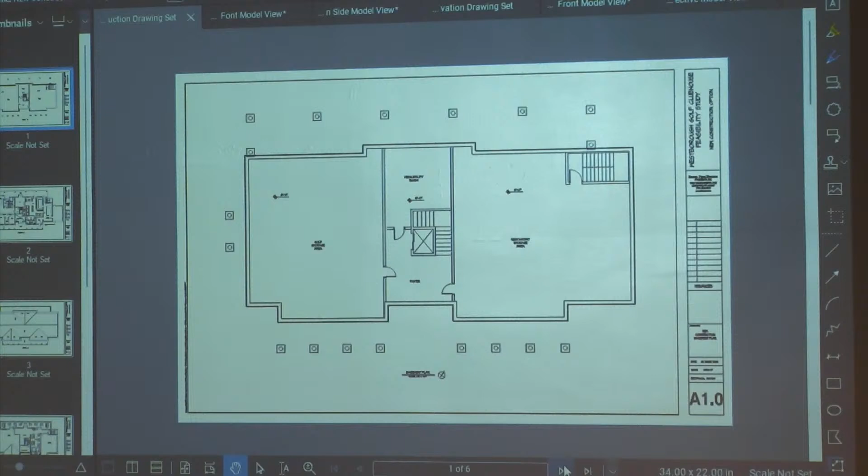And then, in doing the elevations, we played with some of the faces of the building to give relief to certain areas and add some character in. This is slightly changed from what you've last seen — we pulled out some areas and pushed in some areas, but the general layout is pretty similar.

Club shop, pro shop on the left with an entrance, office, storage, and bathrooms, a main foyer that everybody would enter through, and stairs up to the second level of the restaurant, kind of like a rear foyer that could be an interior public space for the clubhouse if they need it, or tables and chairs, a sitting space, extra space, then a bar to the left, bathrooms and kitchen back of house, and a covered patio to the rear and a covered patio to the front.

Which we've kind of imagined as your main approach to the building. For the restaurant, the main approach would be up through there, also to the front.

Imagine this, since we had proposed parking here, you might have a main path coming from this direction and a main walking path coming this way. So this is your main entrance. Then if you're coming off the course, you can enter through the rear, or if you're coming out of the pro shop, these give you your two paths to the bathroom facilities as well.

But yeah, I think we can - can I ask you just one other question? The pro's not here, but I know Howie has a smaller office now - I'm assuming you could put, where the door is now, a door that faces into the pro shop? A lot of times now he comes in, but he can see people coming in and talk to people as they come in.

Yeah, this can all be reconfigured depending on if he wants the door out - so if you're sitting at your desk, you can see people coming in, versus this being a little more concealed. I think there's plenty of wall space in that area, and there can always be little jogs made in the walls to get more, so you can put the door there and shift some of those entrances around.

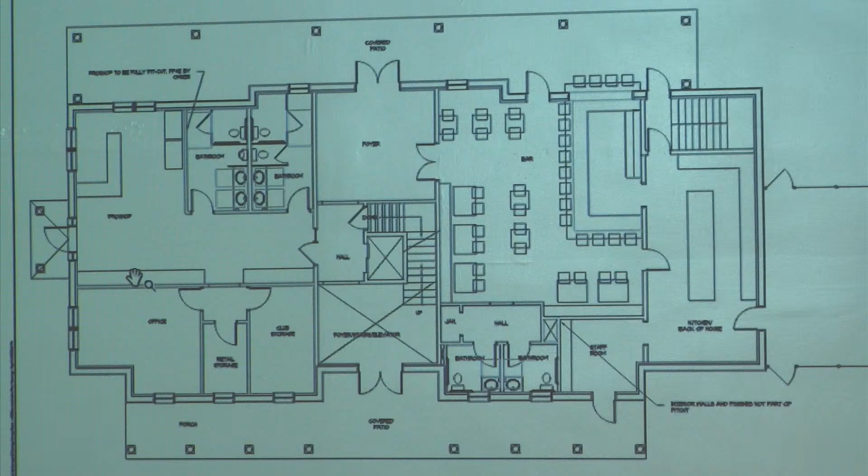Right, perfect. Lauren's touching on a good point - there's a lot more to the design that has to happen from going from here to there. These things are deceptive. It looks like, oh, we're all set, let's start construction tomorrow. But there's a lot of discussion that should happen, and that's the process going forward - you meet, go through it, and figure out all these really important features. How much display wall is needed, where's the best way to have an entrance, the idea of visibility, looking out and seeing customers in the shop, all that good stuff. That will come. We just really wanted to, since we nailed the plan down, make sure everything was given an appropriate amount of space before it went out to estimating, so that we weren't like, oh wait, there's not enough space. It has to be real enough looking without it being the final plan.

I think these are a little out of order. The second level, it's kind of a little unfinished at this point, but you walk up the stairs, you have the elevator, and you have a host waiting area. You have some dining, bathroom facilities, back of house kitchen, and a secondary stair, which would be emergency egress from that level, and be a circulation stair for the kitchen staff to get between their different spaces on the three levels.

So maybe that's a wall right here and some sort of movable partition, or some sort of wall with big openings and French doors or something you can close off and get that separation. And that's kind of one of those next steps of exploring how to deal with that space. We've done some work with churches in particular, but also a lot of our senior living where they're looking for flexibility of spaces.

And so the movable wall - what's really great is it used to be that they were extremely expensive, but there are a lot of people doing them now, so costs have come down. Again, that process would be as, in the future, we'll show you places that have movable walls, we'll have you move them, try them out, see what they're like. But they're great. In a church that we did fairly recently, they wanted to have several classrooms, but then open it up so they could have a wedding in their large space. So there are just nifty ways of burying them and making little pockets that you fold them into - that would be the idea here.

Yeah, but that space could definitely be divided up in a way that you can still get your private dining space that seats roughly 60 people, and then have some dining space for the restaurant, so that you're not taking away all their dining space if they were to ever host a function at night, which they might want that ability.

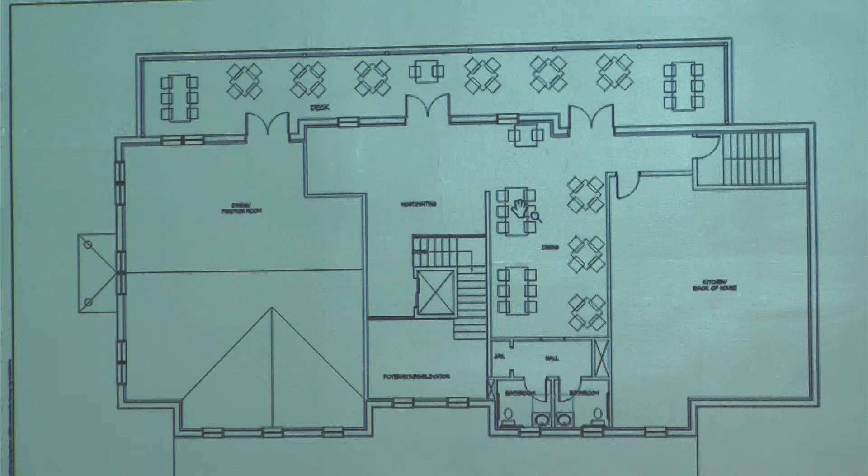We have a pretty good amount of floor space up here to work with. We threw in a roof plan as we're starting to build the model and figure out how it may actually look. So we'll just go to the elevations.

For this new construction, we stuck with the aesthetic of the existing farmhouse. It's a Greek Revival, Colonial Revival house. This iteration leans a little more Greek Revival, but we copied the details from that front gable, and did two separate front gables on the front, one for the pro shop, one where the restaurant space is, really trying to capture the detail of the pilasters and of the gable and the box eaves and the trim running across.

And just to be clear, that top image is the front facing the parking lot, the street side view, and the very large balcony on the lower image is the one that faces the golf course.

We have this, we were calling it a porch in previous iterations, but more of a covered patio, as the columns sit on grade. That will tie in to that row of existing traditional homes and porches coming down the street. It gives you a nice sheltered walkway to the main entrance of the building as well. And then a nice gable here to call out that that's where you're heading, and provide room for signage as well.

Having the back gable higher than the front gables - it just allowed us this wider kind of space on the interior. It gave us a little more square footage to work with on that back wall. Pulling that gable out, it could be a smaller gable to tie into the front as well. We just thought with the back, pulling it up to the ridge height, since there's only one gable on that side, it gave it a little more prominence too, when you're looking at it.

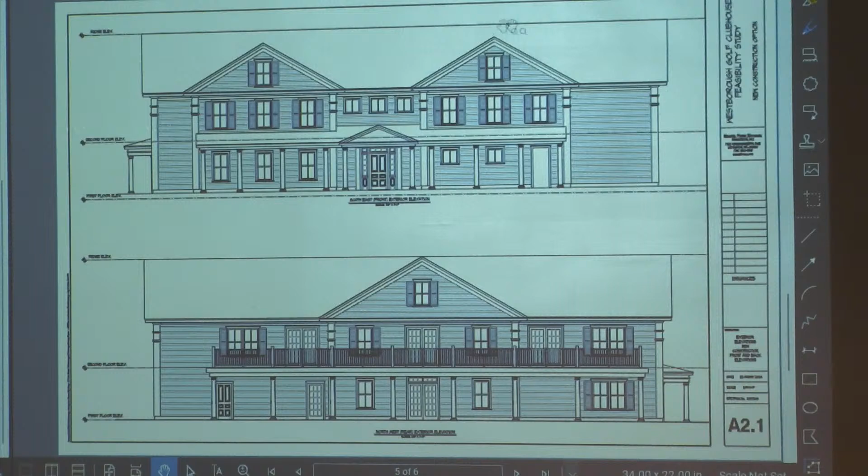How would the building feel if the top of the roof came to the top of those lower gables? If it came all the way down, it was like a lower slope. I don't think it would - I think we could still make it feel right. I think we could study that, right? I don't think that's an issue.

If you change the height of that ridge on the back dormer, you'd also have to change the width, unless you're not gonna match it. Exactly - this would get less wide, those side gables. So that's kind of what we did - we set up the side gable to be a proportion that we thought worked with the space, and then did our other gables around it.

But there's always room to massage these things. And that's to get a sort of different preliminary design, you know, from what's the feasibility. No, you guys have made tremendous progress.

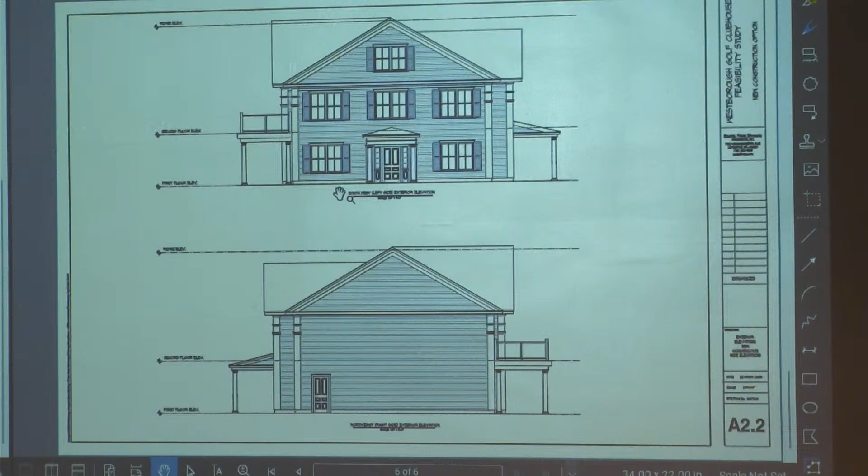Yeah, I guess the only other thing to be helpful is, eventually we're gonna be talking to restaurateurs, developers. It'd be good to know the number of seats that each of these options give, and I know that's part of the package - we can make a little list. Yeah, we'll have a list - I mean, it's really square footage, the square footage, occupancy loads and all of that.

And we can even populate a bit more, like with the tables and chairs that you see elsewhere, like in the pub area there. Just to give you a rough feel, like this is what you could have, and then code allows you X number. There's a lot - you got a lot of seats.

I have a couple of questions. What is roughly the overall length of the front of the building from the extreme outside to the extreme outside? 60, 70 feet? Yeah, so each of these gables are 28 feet. I think this comes out 16 in the middle, so it's 56 plus 16, 72 there, I would say, and then you have this phase.

Well, I have a colonial house and my ridge is not 31 feet up. I have an 8-pitch roof, 2-story. But anyways, it just seems to me that this is much bigger than I envisioned in my mind. I understand we're trying to get a lot of stuff in a small space. Yeah, and the bag just don't hold it all.

At 72 feet, that just, to me, says it's so commercial, even though it's looking to try and fit in a residential area. I don't know that there's much that can be done with that. That's my observation. It's not right or wrong, it's just what it is.

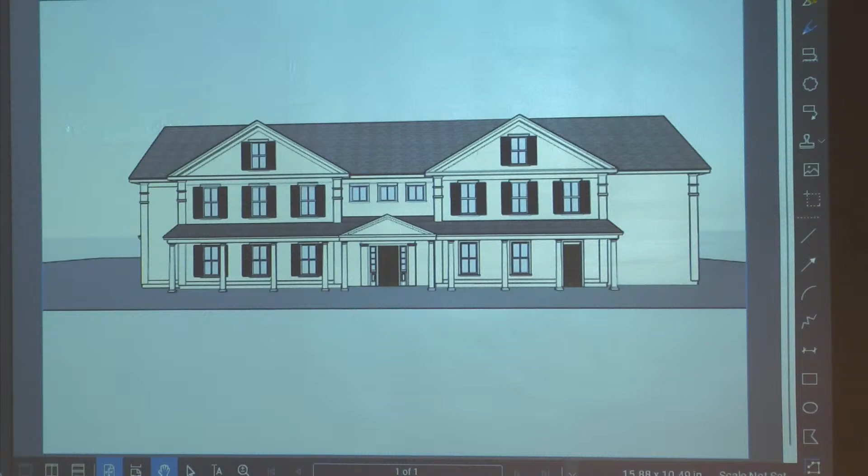I think when we've gone up and down Main Street, the houses are really significant. The other point, it'd be good to go to the model actually and see it, because with a flat, straight-on elevation, you don't get to appreciate some of the ins and outs we were talking about.

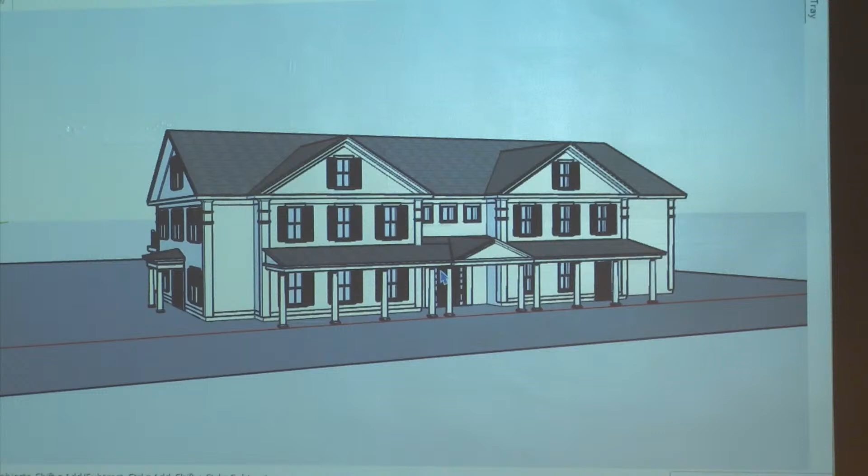It is a large building, I'm not trying to say that this isn't large, but it's also on a site where it can afford a certain amount of breathing room around it, and it isn't a straight house. It is house-like. I'm not knocking it, it's just an observation looking at it. It's not a small building, it's not a nursing home.

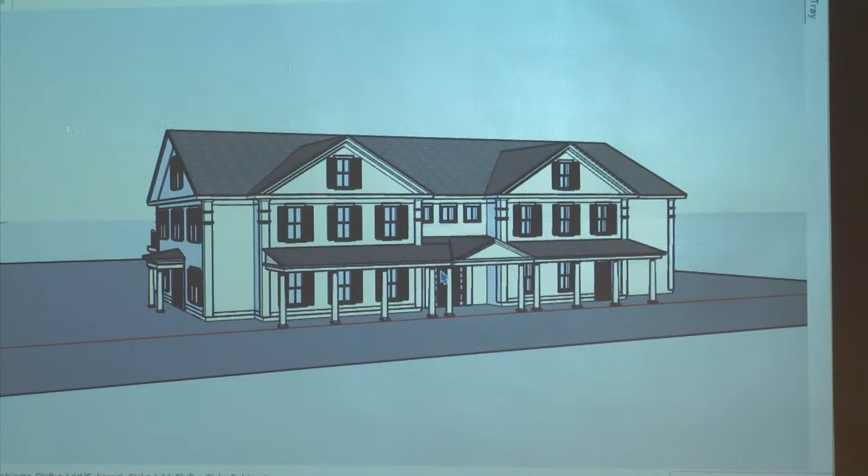And that's interesting, as we'll get to in a minute, the one where we're actually using part of the building - you'll see it's much more broken up in there, even though it has the same functions.

But you're right, do you know how many square feet this is? No, we can get that information to you guys after the meeting. I don't have my CAD drawings up to grab it off of it.

As you said too, the two side pieces are set back, so the front protrudes out, and a lot of that can be 70 feet, and then it's - oh, no, I understand, and I like the effect of that. I don't like a straight line building, because then it's just flat.

And the porch is also, in this case, certainly helping break that up. The porch only uses a little bit of the front, kind of a dormer, or gable, you know, gable, yeah.

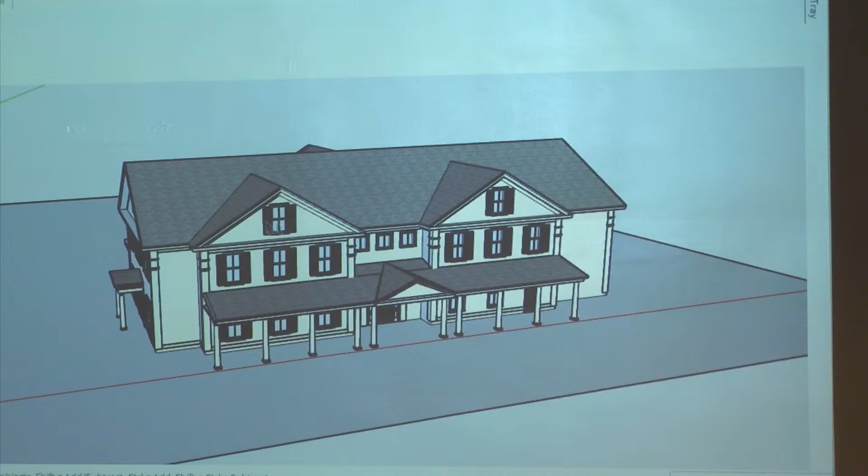There's always little tweaks that can be made - like this is the kitchen space, so maybe it comes down in volume a little bit, as they don't quite need a vaulted space and the same amount of room there, but there's many tweaks that can be done to try to get the scale down a little more.

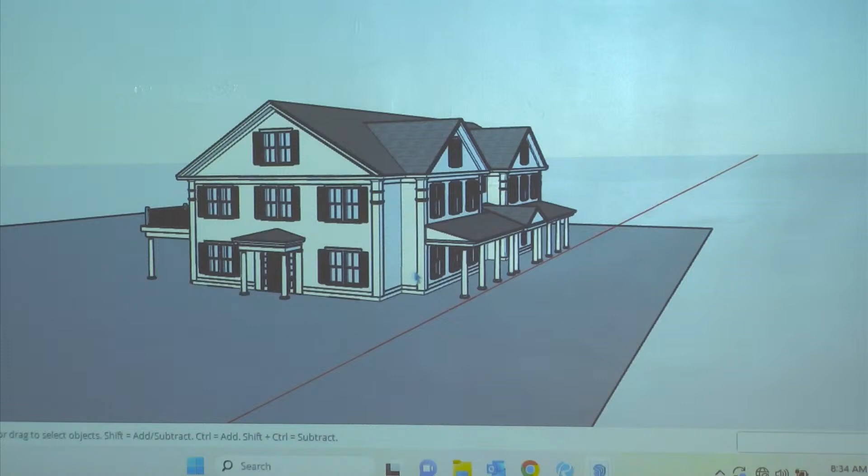It is big. I have a couple of other things, if I may. On the front porch, you show a half gable at either end of the porch. To me, in keeping with this style, and I could be wrong, but I think the hip roof look from either end would bring that porch look down a little bit, because the roof now slopes away to the peak, or up to the peak.

We don't have this block coming out to the corner of the front of that. I think the present building has hip roofs on the porch. It does, yeah. No, it could - if it were me, I'd prefer to see that. To me, it's a more pleasing look, but I think it's gonna bring it down a little bit in scale, even though you're not changing anything but the roof. You're just changing the perception of that.

Exactly. And the other thing - under these porches, front and back, is it a slab, I know that's something that can be determined, but what are you seeing right now in this picture? It's footings, not a deck. It's an entrance, not a deck, just footings to support the columns, not any sort of crawl space or basement space.

It would be hardscaped there, like a walkway. You need to do that, have something well-lit and all that nice stuff. It's a great lighting opportunity too, so you don't have light pollution coming in that people would see. But yeah, it should be a hardscape.

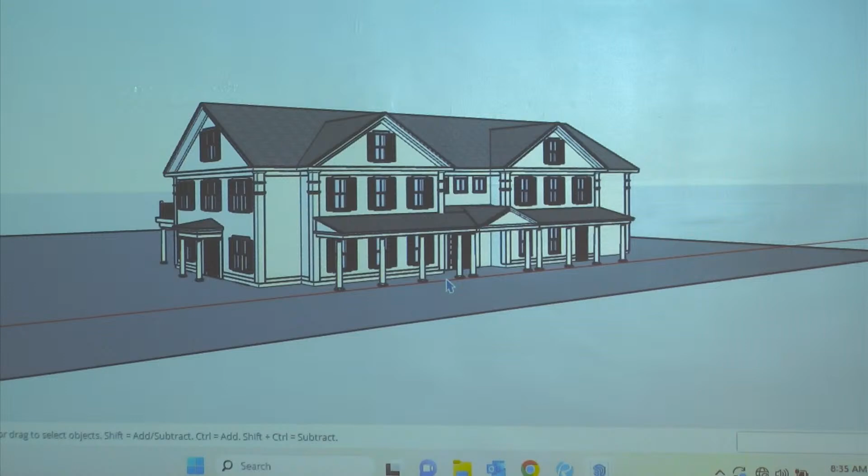Very good, thank you. I'm pleased with the step back and pull in and all that. I like that, just now seeing it in better perspective, it looks big. Yeah, it's really great that we're getting into the detail. This is great at this stage of the game. It shows the excitement we have in the office about the potential, once we hit the ground running in design.

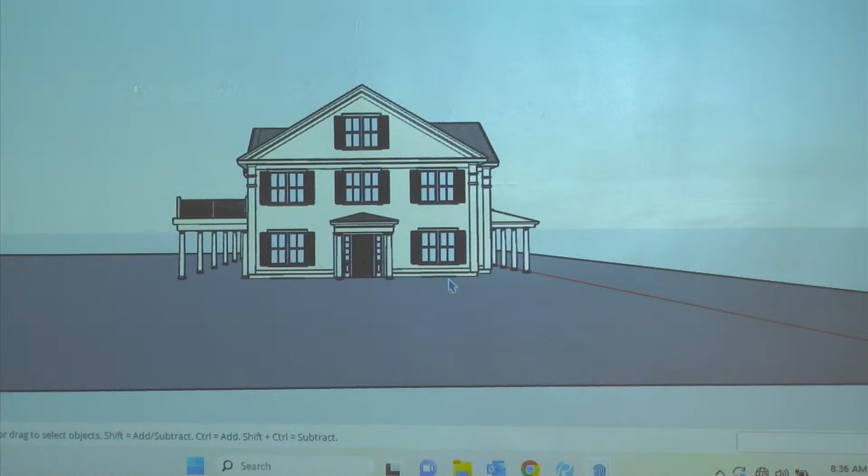Well, the side looks like the front of the original building right now. Should we go? I tried to pull some of those. Should we go to the other option and look at the details in that one? Can you just run this around the back? Oh sure, good, sorry. Oh, that's nice.

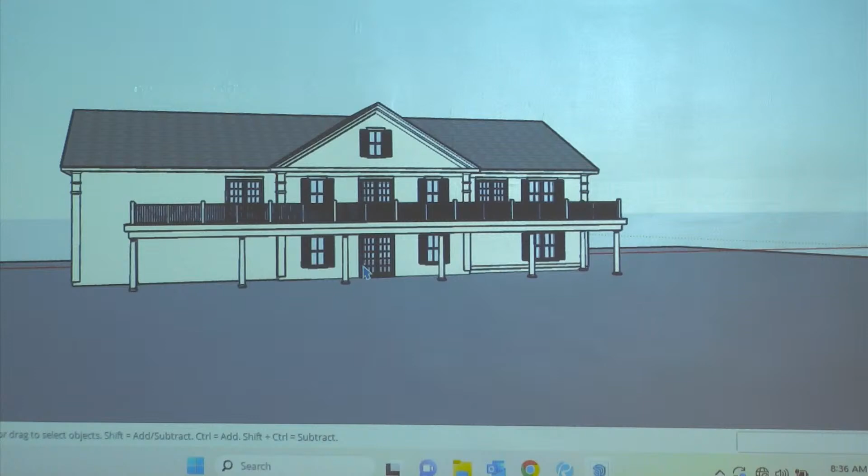There's so many options and opportunities with the rear too. If you wanted to carry over that double gable look on the front, we showed a different option, just to get the one gable on the back. But it's really limitless with the little pushes and pulls you could do here. There's definitely ways to get that ridge height down and decrease the size of that front gable, so maybe you're keeping the building the same size, but perceptually making the roof look smaller. You called it out at 7 inches.

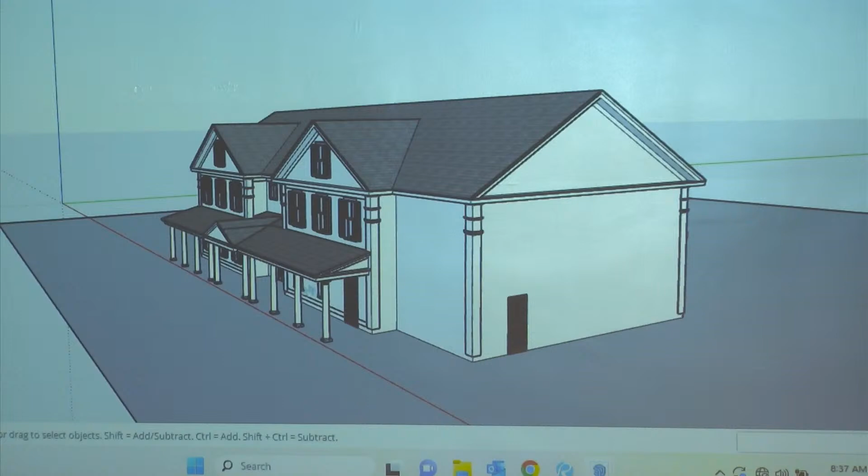I think that's more in standard with an old look. 8, 7, 9, even 10, we like those. When you start getting down to a 6 pitch, which brings the roof line down, you start getting a squat building, and I think that looks worse than anything else. Yes, we would agree with you on that one. These are all 7 to 12s, which I think is the original pitch of that original farmhouse as well.

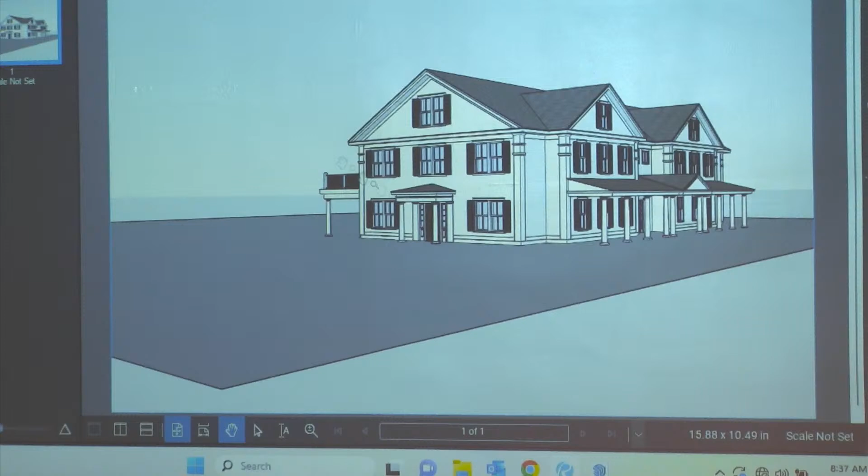Yeah, we can get into the other option. Would you like to see it? We have some screenshots that we provided you guys of the model as well, for both options. Looking at that renovation option.

We still show keeping that existing basement space, but that might be something where when you get into it with ceiling heights and stuff, that maybe that's purely mechanical space, and you just don't want to use it for restaurant storage or pro shop storage due to it being uninhabitable space. You always need some of that. A lot of this currently is crawl space under that porch, and I imagine when that enclosed porch comes off there will potentially be some work down there as well, but we would just keep it as crawl space with an access point, and not try to make that any sort of inhabitable basement area.

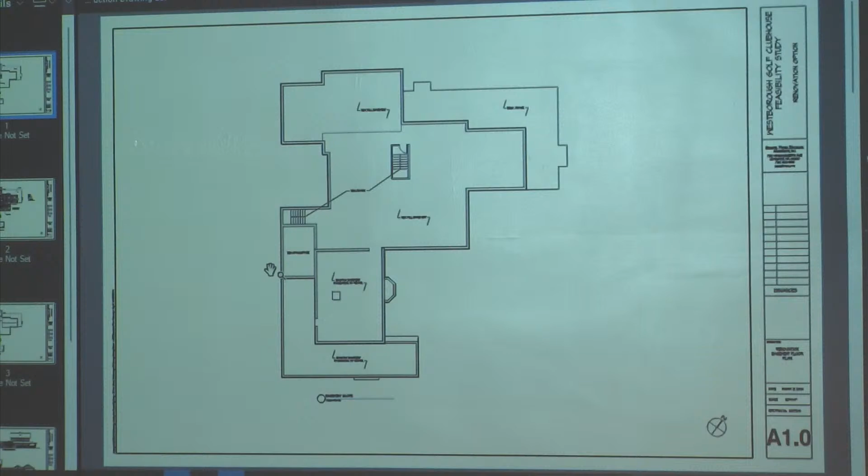And then this would be where the new entrance is. It would be crawl space just due to the fact that we have to be at grade level to get into the building.

The plan has not differed much from what we previously looked over: restoring the porch, a new entrance with a ramp, stairs, a host waiting area, a formal dining room that could be a function space, new bathroom facilities, and then the bar in the back with a concession window and another more casual dining space, with the deck that wraps around and looks out to the golf course. Some back of house area for the kitchen, solid kitchen space with access to the basement, and then the pro shop would be completely separate from that restaurant space.

So that's kind of the plans we sent out to our cost estimator, so they're all marked up. One of the things Arthur had sent me for questions, and I was going to bring it up to the board, was the mechanicals for estimating. There were basically two options he laid out: one big system that would do the whole building, or would the pro shop and the restaurant have separate mechanicals?

I didn't answer the question because I wanted to get everybody's figure on it. Basically he said they could do it two ways: they could just put cabinet heaters in the restaurant space for now, and the fit out would be done by the restaurant putting in their own mechanicals, or the town could install the mechanicals and have stuff stubbed up through, because we don't really know what they're going to do for their fit out.

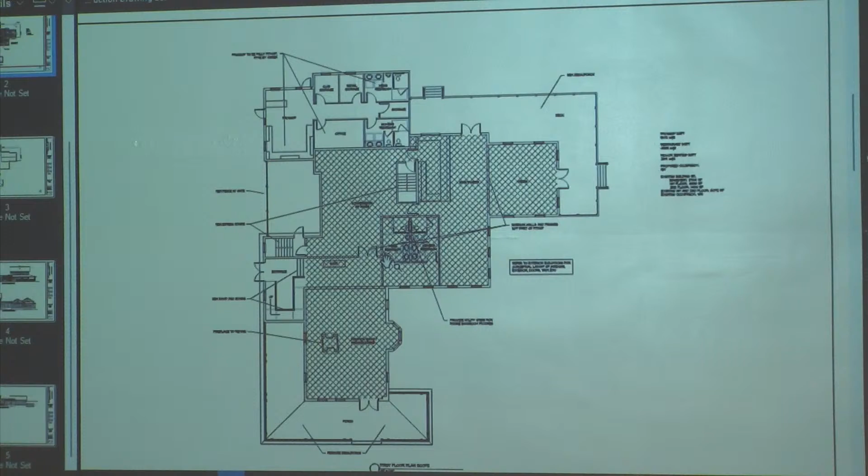That's good, and that was really the pro's call on what he needed for the golfers, more of what he didn't need.

So getting into the exterior elevations, we're going to start off looking at the left side view, which is the parking lot side.

We've kept that main volume, restored the porch per some of the historic photos we've seen, and created a new entrance that's a little more prominent on that face, so you can really tell where you're supposed to be going.

That's the restaurant entrance. We have a little back of house to the kitchen space, somewhat similar in layout to what's there because it's really the best location for that.

And then a new golf clubhouse that's done more in a Greek revival style. We wanted to give it some character, but not have it overshadow the main house. So it's a bigger volume, but at a lesser scale than that front gable. We have some play there if we wanted to raise stuff up or explore further, but giving it a presence, so you have your A building, the historic building, and then this is like the secondary volume in that new addition.

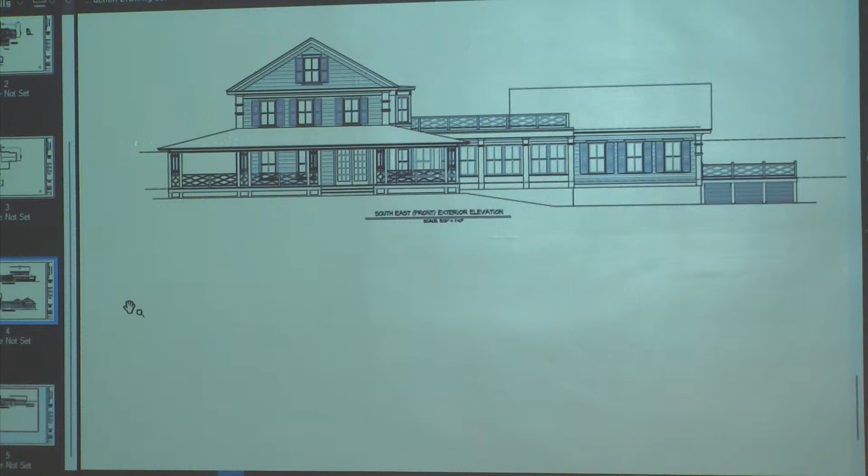On the first floor in the main building, the old building, I assume you guys have been in and looked at all of that. Yes. What is your recommendation? Because if somebody's got to price this out, this is information that's going to have to be known. Is this a complete removal of the first floor and rebuilding of the first floor? Because I'm sure it's not to today's code for a restaurant or any kitchen area or whatever would be in it.

I don't want to have a forest of posts and whatever's there for a cellar now, not that it's usable, because this is the old part of the house with a stone foundation. But would we put a first-class floor in there? It would kind of depend on what they uncover during demolition. But I think to price it out, somebody's got to know that. I mean, if I were remodeling, I'd want to know whether I'm replacing it or trying to rehab it, because rehab is a whole different animal, and it would probably be more expensive.

I think there are some elements in there we could take. For example, the mantle in the fireplace - if you want to keep that and reuse it, we could do that. But I think cleaning it up and giving you something nice and sturdy, proper, would likely be the best scenario - make it new and then bring it back into the style.

Foundation in that part of the house being stone foundation, what's gonna be the recommendation from you guys to handle that? You're gonna spray shotcrete on the walls - close this up, make it, I don't want to say more modern, but well, it has to be. Get rid of all the cracks and crevices and mud holes.

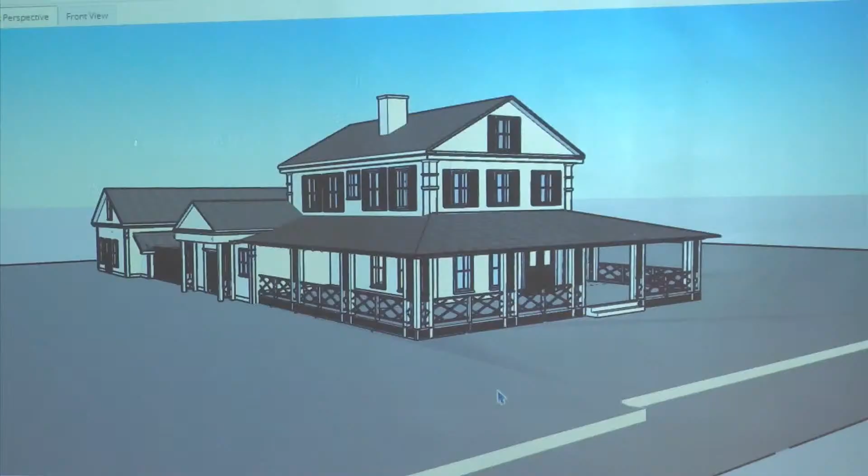Let's go quickly so you get to see what the mass of this is, because it's kind of a tough massing to see in elevation. As we're working within that footprint, with everything added on, it kind of moves its way around the site.

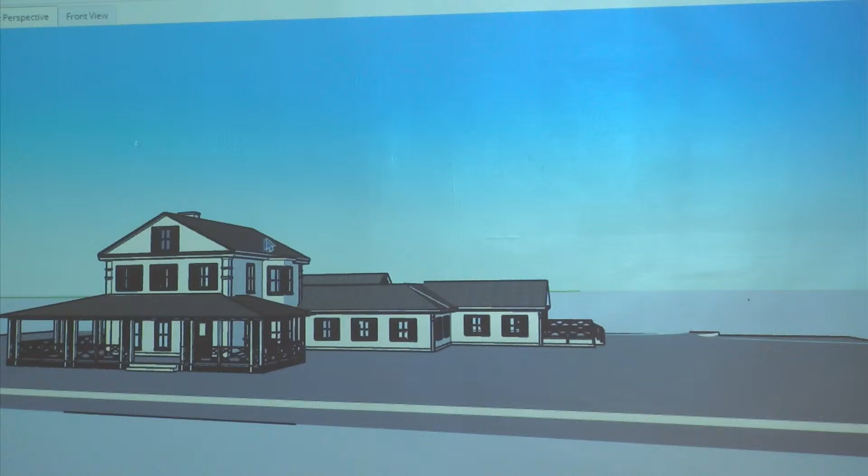So we have the street approach. This is the area where we have two different options at the moment, but we're trying to keep the scale down. There are certain opportunities with the pro shop and this second dining space to get some more height and have vaulted spaces to play with that height. So not everything's at this one-story level - we're preserving the front of the house, the bay, the porch, wrapping around, having a new entrance into that restaurant that really stands out so you know where you're going.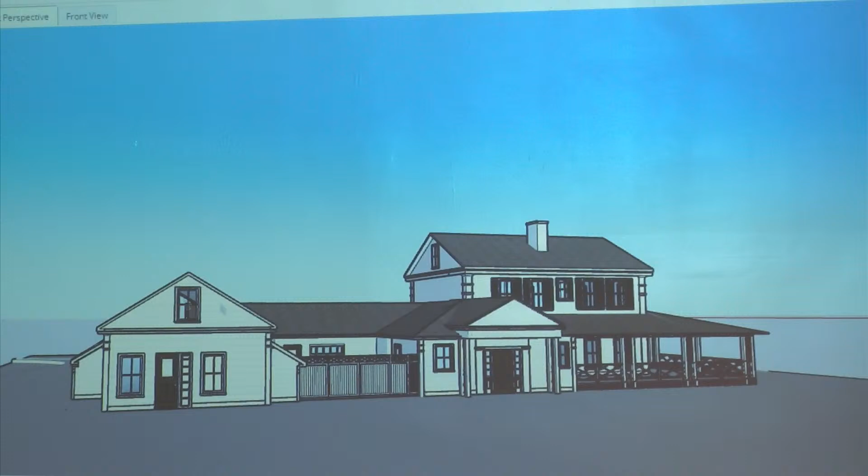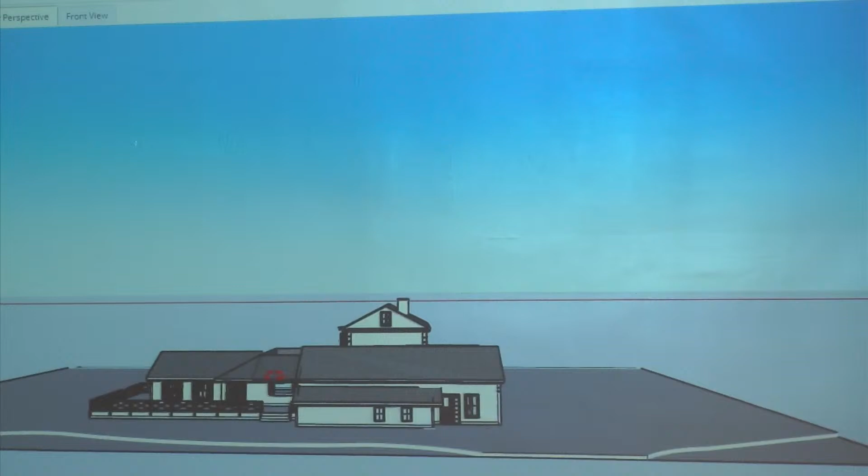This isn't quite modeled recently to match what we're showing in the elevations, but having a new golf pro shop, making this a little grander so it gets some presence on the site, putting an entrance on it so you know where you're going. A lot of this area of the pro shop is bathrooms and storage, not anything with a huge presence, which is just due to its location on the site.

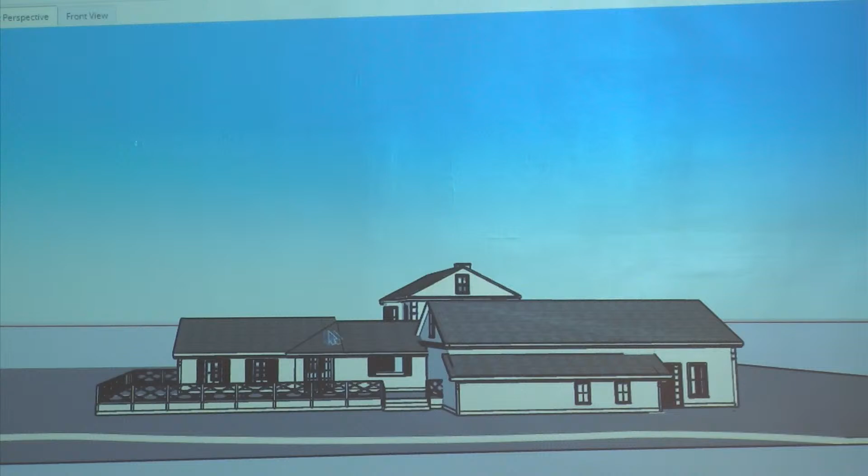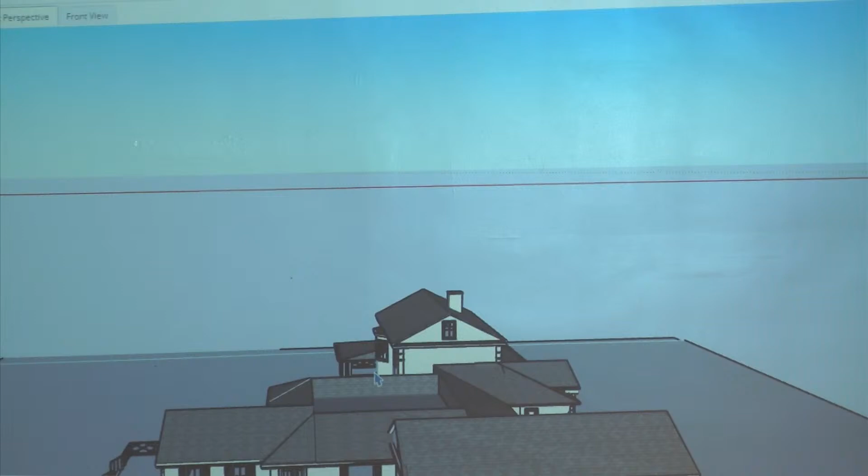But this entire area would be an outdoor dining room, entrance to the bar from the golf course, and a concession window. So maybe popping this up and making this the main vaulted space, then keeping the roofs low over here to tie everything together. We're showing a utility well on top of the kitchen with these hipped roofs to create a space where you could put equipment and hide it from view, since there's going to be a lot of equipment coming out of that kitchen that isn't pretty to look at. This gives us an opportunity to do a well, or in the elevations we show a flat roof with a balustrade around it to provide coverage for those penetrations.

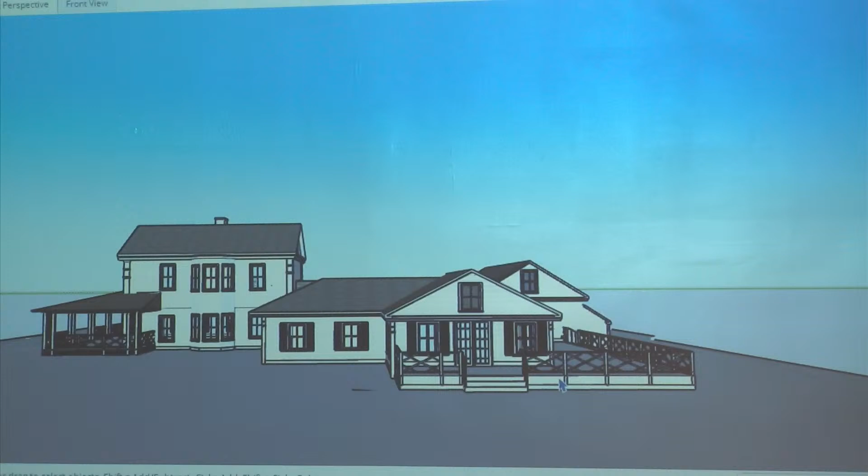Maximizing your views out. Just a question on the outdoor space - when we looked at the new build, there was talk you could do stuff with covers here. This looks a little lower, so it'd be tougher to put a cover. It would be tougher, but we have some flexibility - some of these volumes can raise up if you wanted more of a flat roof coverage or a low pitch coverage over some of the dining area. That could definitely be done.

Or just a place for awnings to come out. Absolutely, once we start that discussion with you, there are lots of ways to make this more three-season. It's nice to give this wall some flexibility - the pro shop side is pretty window-free, it's all bathroom space, so we might have some higher windows, but we definitely have space to design something in there if we want covered dining areas.

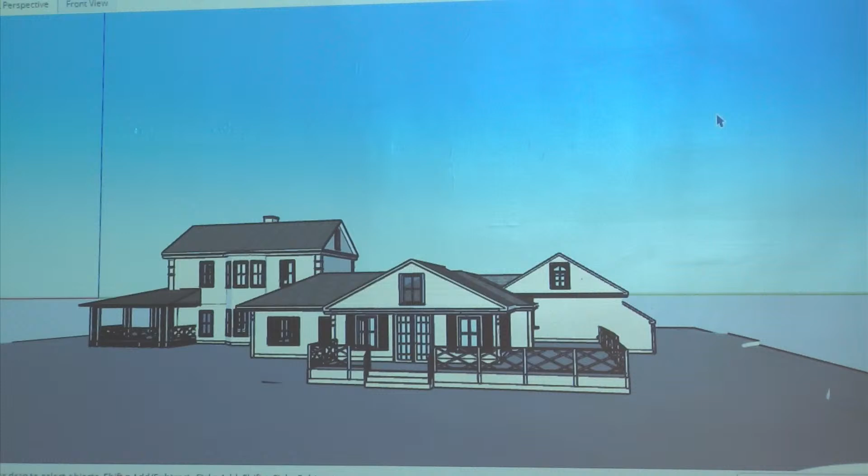One other thing - I was looking at the roof on the existing building versus the new building. Whenever you have stops, rises, and direction changes in roofs, you create a situation where water, snow, and ice can raise hell. Looking at this remodel of the existing building plus the addition, I see a lot of roof line changes. I don't like that. I'd much rather have a neat, clean, easy roof flashing. That's a big concern to me, because we have a problem with snow and ice in our town.

All right, New England - that's great. It is New England. Anyway, back to you folks to continue the discussion if there are any questions. We're really excited - we don't think there's a wrong choice to be made, and I think it'll come down to numbers and further discussion.

Well, having worked with BFE, when they put this in the context of the site, my first reaction was that the new building looks awfully big, but when you put it in the context of the rest of the golf course, it may look different. We're going to work on that. We've been building the models and getting everything up to a level to really start putting more detail in and getting context in, because the renders we'll have as a deliverable will show it in the setting where it would actually be - you'll see the hill behind it. We want to leave a little something left for design on the project.

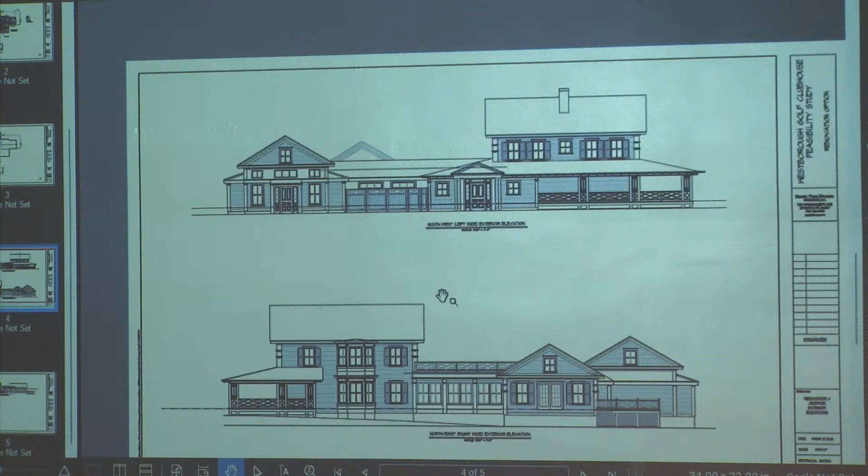So you have some takeaways from us in terms of giving us some more ideas. Absolutely - we appreciate this, it's still kind of a work in progress. One of my questions when I was looking at the stuff from our last meeting was just understanding, trying to...

An ultimate goal here is actually to try to make this at what I'll call zero cost to the taxpayers, which means the golf course will pay for its part through user fees, and that the restaurant and our lease will in essence pay for what we're going to construct. So part of that is trying to maximize for that restaurant piece - if we fit in the function room for 60, but then the restaurant and bar is this big versus that much, that's going to affect what we could get from a lease payment. So it's really trying to understand how that fits and how it works, and that will help us understand how we can get to the point where, as I've said in many public meetings...

The goal here is that this doesn't cost the taxpayer anything in the end. Well, that's what we have to talk about now.

Yeah, and we will be there with you, helping you on that. Yep, it's not like, okay, it's your problem now. No, we're going to be in there to provide the information, arming you so that the right decisions get made.